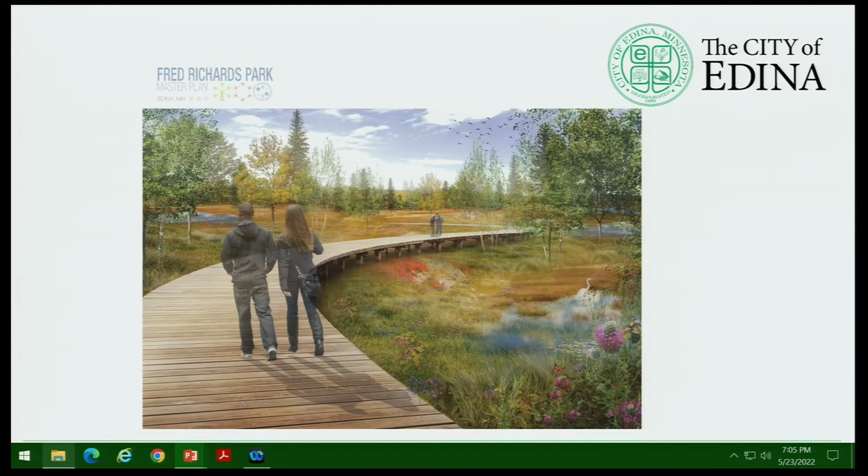Just a couple of ideas or information about the southeast quadrant. It contains about 20% of Edina's parkland. However, it only encompasses about 5% of active play opportunities. Fred Richards Park Master Plan will complement greatly 2 wonderful gems of Edina's park system, and that is Arneson Acres Park, located just east of Highway 100 off of 70th, and what we also consider is the crown jewel of Edina, Centennial Lakes Park, located just east of France Avenue.

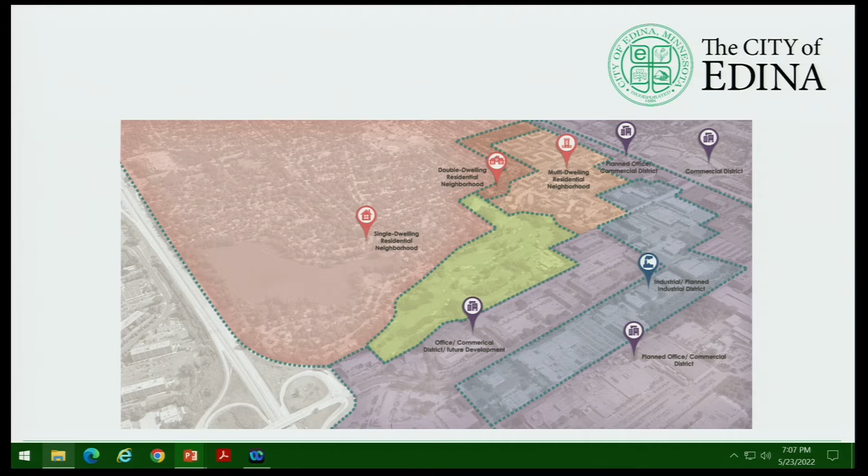As we look at Fred Richards over the years, one thing that is kind of constant is that it has been changed. Change is constant in our park system, in our park realms. However, that change can often go at a fast pace or a slow pace. When we look at this, just the history of that area, we look at very early on. And the Fred Richards area was home to a massive wetland complex in the southeastern portion of Edina.

Part of why the plan you'll see this evening really goes back to its roots and embraces those wetlands that are within the area, and how to assist in some of the major issues Edina faces, such as flooding and climate change, with larger and more intense events that we see on a frequent basis.

As this area progressed over time, we see it transform around the 1950s, 60s and 70s, up to the 80s, where Fred Richards Park went from office and park use into more of an athletics feel, and eventually into Fred Richards Park, the golf course, that closed in 2014.

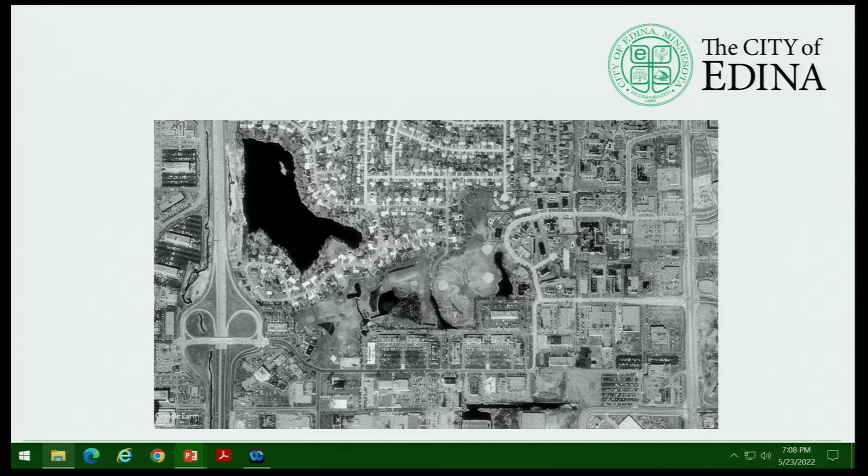As you'll see on your screen this evening, this is an aerial photo from one of those phases, probably around the late 60s or early 70s. It's an undated photo, and you can see a very intense athletic use on the eastern portion of Fred Richards, also with a lot of dark areas that are water. On the left edge, closer to Highway 100, you see remnants of the par 3 golf course.

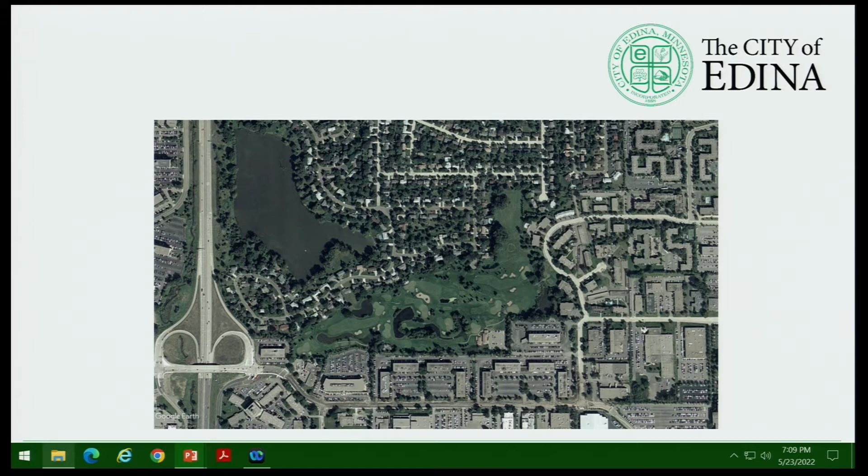What occurred after that was a project timeline to engage residents about the future of this area. It had 4 phases: discover, dream, design, and do. The first phase occurred roughly in November and December of 2016, with a lot of pre-engagement activity, data gathering, wetland delineations, and research.

The next phase, the dream phase, occurred roughly at the beginning of 2017, when a lot of communication and public engagement kicked off, with community gathering meetings, community focus groups, and pop-up activities at the park to gather input.

The final phase was design and do, both occurring in the mid to latter part of 2017, where ideas came into fruition, pen on paper. The do phase highlighted major activities like master plan preparation, review by the Edina Parks and Recreation Commission, and ultimately approval by the Edina City Council. That's the plan adopted in 2017 that we'll review in greater detail.

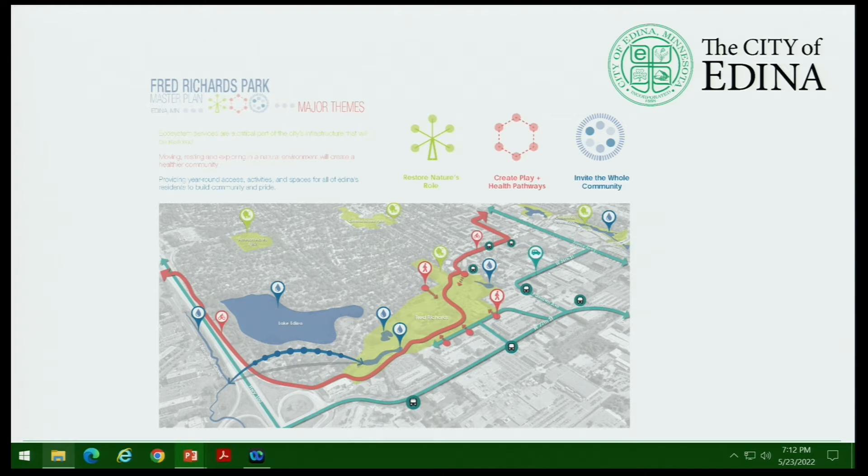Those three themes resulted in the adopted Fred Richards Park Master Plan, which has 5 components, 4 yet to be completed. The first is the nature bank, the second the central green, the third area called the Great Lawn, and the fourth the Loop. The fifth area, completed in 2019, was the neighborhood play area, located on the east side, primarily serving the Parklawn area.

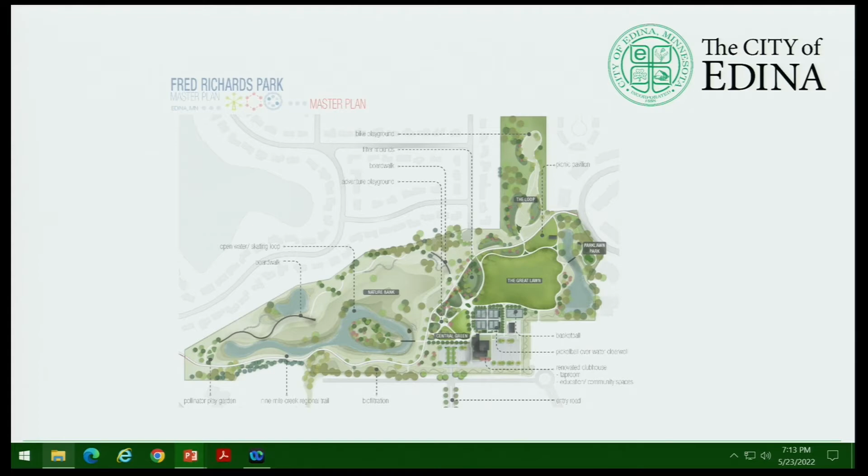So the first theme is restoring nature's role. As I mentioned earlier, this area, and Edina in particular, has a lot of concern about flooding and stormwater management, especially as we look at what climate change is doing in the future—more intense, quick, severe storms—and how Fred Richards can play a role in helping mitigate that.

The idea here was to create a nature bank, wetland banking, restoration of landscape function, and keeping all of that valuable soil on site. This helps solve increased flood pressure, where about 13 acres of wetland complex could be created and about 23 acres of natural area on the western portion of the park, primarily buffering that northern single-family residential area. The idea is to keep that soil on site to help create other functions of the park system.

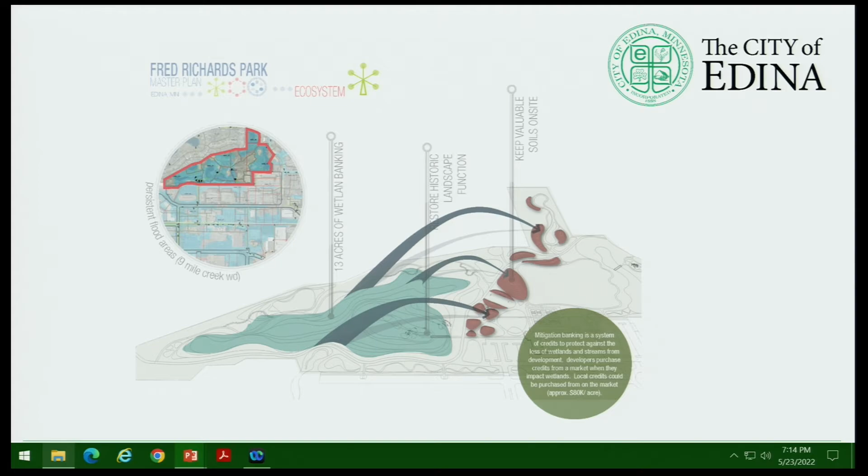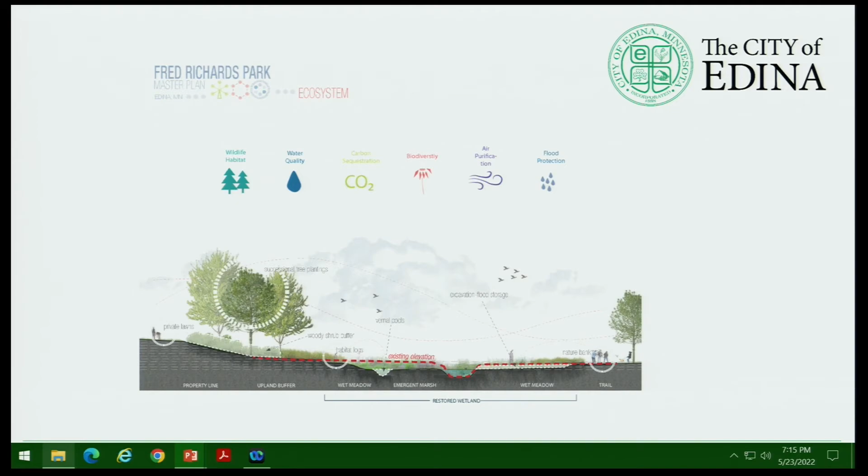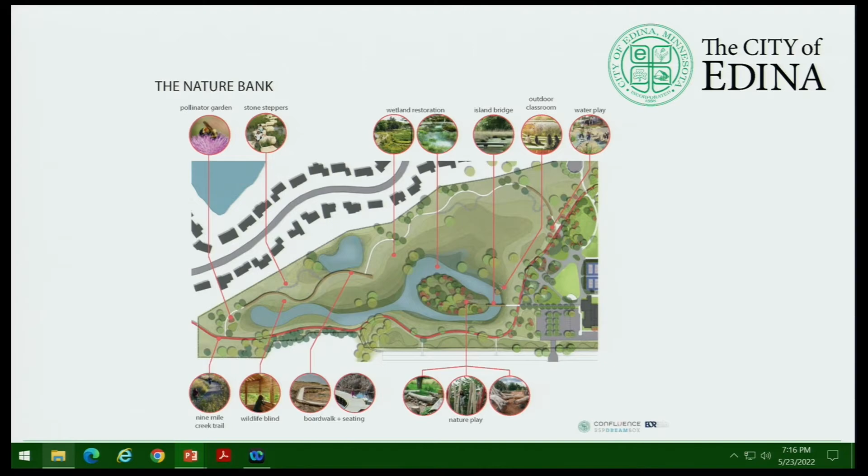This is a top-down view of the master plan. The red line that intersects this portion of the park is the existing 9 Mile Creek Trail system. When we look at that restored or nature bank area, it's primarily to the west and north of the 9 Mile Creek Regional Trail. There would be areas for pollinator gardens, using some pathways as stone steppers, wetland restoration, pollinator areas, water play features, areas to view wildlife and get close through boardwalks, seating and contemplation areas—really an area where we can return to nature and play in those spaces.

Progressing to the second major theme, which is creating pathways for play and health. You'll see this major theme overlaps with a large portion of the park, from the western edge into the more active central area.

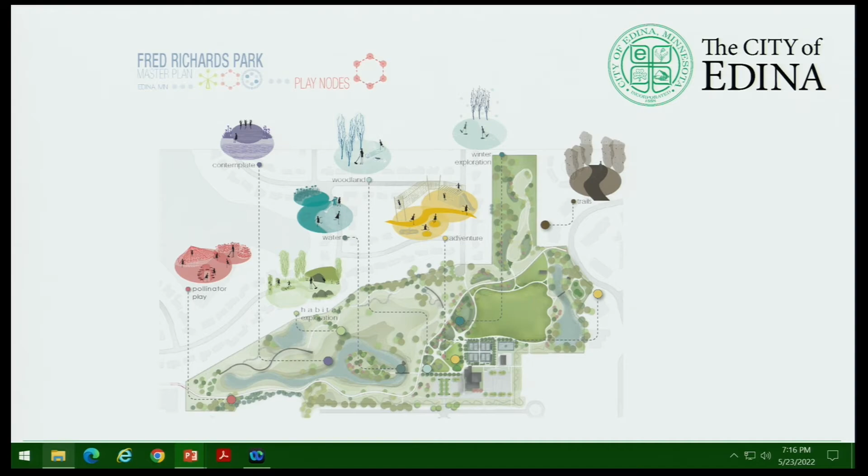The first is creating that pathway for enhancing our pollinators—improving the quality of our restored areas and additional plantings that go towards our climate action plans, more of those specific plantings and enhancements that we can add in that area.

The second piece is contemplation. When you're in this area of the park, it's a little bit more serene, more protective, quiet. You can be by yourself or with close friends and family, really enjoying just that nature and serenity of that area.

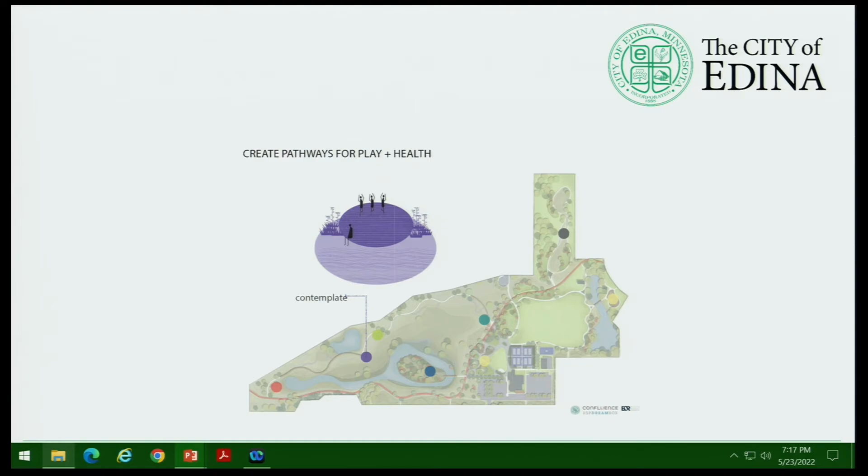The third is improved habitat, as I spoke of. A number of people I've talked to about this master plan are worried about the future of the park—are you going to pave over everything? That's absolutely not. We want to create this habitat, this area of restored function to those wetlands, to attract that wildlife.

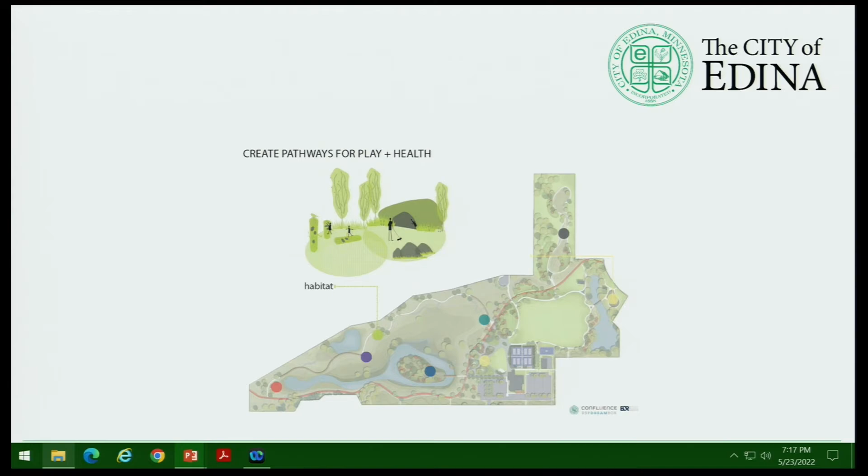Water—creating pathways with water. Understanding, interacting with and playing with water is often a better way to educate and create future visions for how we can adapt to climate change, and really understand the changes we're experiencing here in our community.

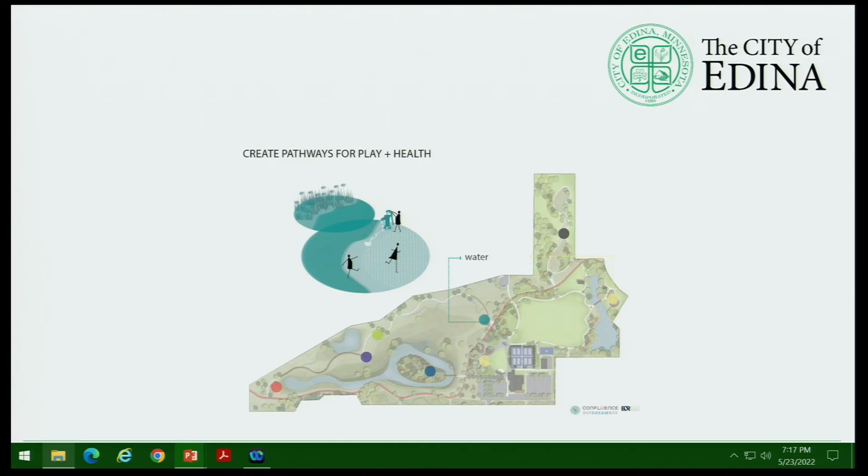The traditional play features—obviously a major function of this park is a community level playground. It would be accessible, reducing any barriers. But we've also looked at how we can have a play area that supports others in our community from a sensory-friendly focus. I've had conversations with representatives from Gillette Children's Hospital about how they could help design areas where children can play in a different manner than they're used to—not only traditional play, but non-traditional, supporting those with sensory needs.

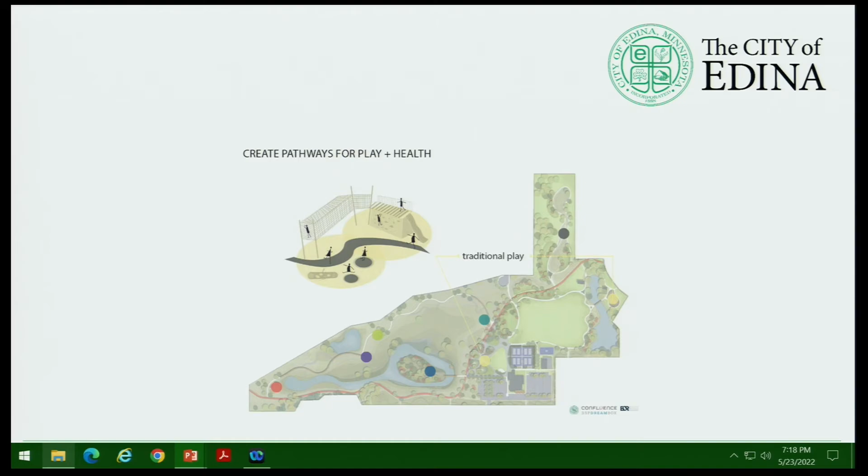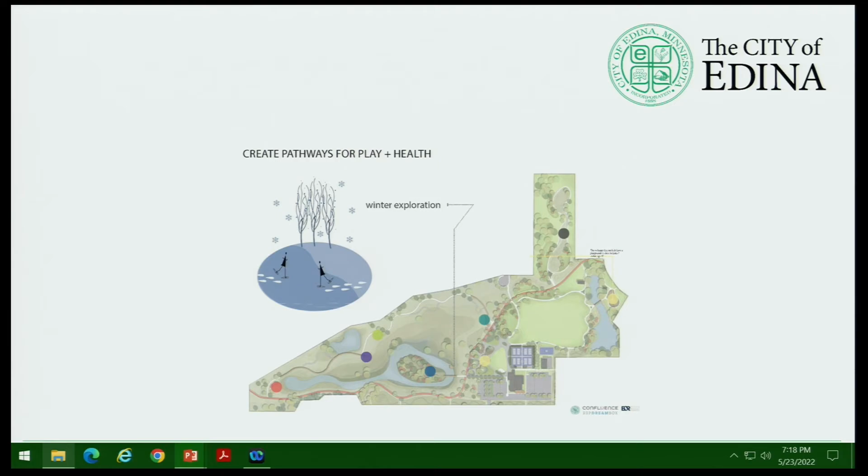There would also be an area for winter exploration. Minnesota is experiencing its major season right now, which is road construction season. Behind that, people's least favorite season is probably winter. However, in Edina it's a little different—there's a strong tradition of skating and use of the outdoors, and Fred Richards would be no different. There would be opportunities for snowshoeing and interacting with winter activities and programmatic elements we could bring to the park.

The other area is the loop—a small area people could walk through, with small trail and bike skills equipment for our younger users, so they don't have to worry about being on a regional trail or near streets, and can enhance their skills on a small loop level.

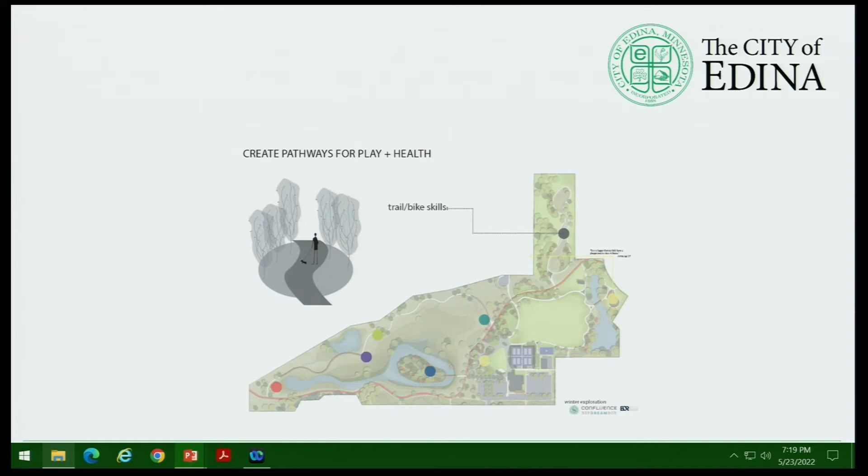And the last theme was inviting that whole community. What does that mean, inviting the community? It means all of the things that Fred Richards Park could support in the future, from the morning walkers that would use its trail system to different activities throughout the day, parent clubs meeting and using the site for a variety of different reasons.

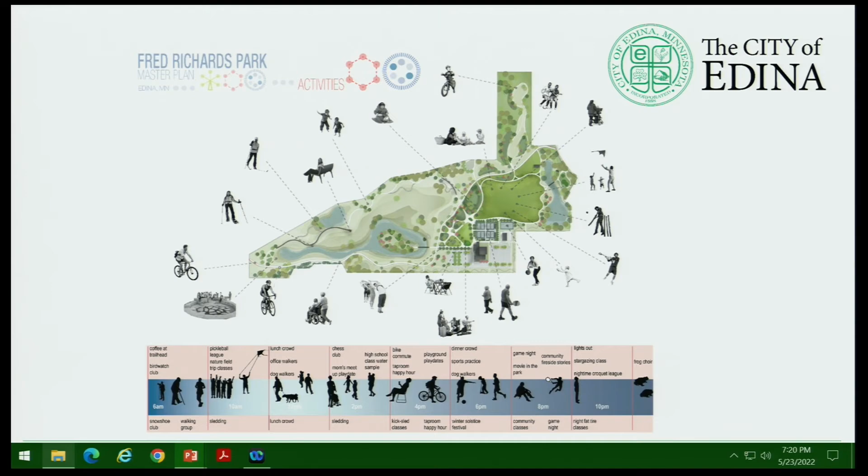After work, people getting together and using some of the more active pieces of equipment, participating in a lot of our programmatic elements that we could bring to the site, and then culminating in that evening use where the bikers are headed home, the walkers are headed home, and the park becomes quiet again, reflecting overnight until the next day's users arrive.

Some of the functions that would support inviting that whole community are enhanced in the central green. That would be the Hammock Grove, a very popular activity occurring now in a lot of our park systems, often called hammocking, with hammocks, people reading, enjoying the day. As I mentioned, there would be unique play elements from traditional to sensory-friendly to accessible.

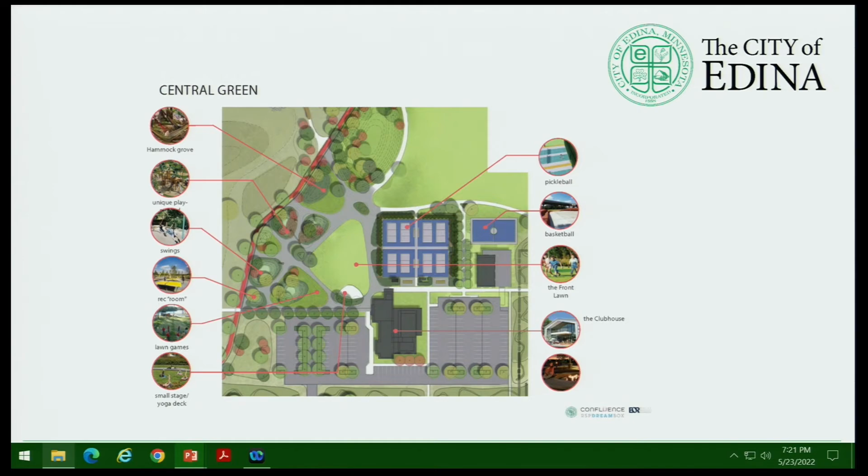There would be obviously swings in a rec room feel with outdoor aspects of table tennis, lawn games, even a small yoga deck that could be programmed for reflection and activity. There would be the clubhouse, which we'll get to next, and the front lawn, and basketball and pickleball.

When we look at the Great Lawn and that neighborhood park to the east, a lot of that soil that we would transform and keep on site from creating those wetlands that traditionally want to be there would be brought in to enhance the park from an elevation standpoint, to help block out that activity from the surrounding areas. There would be a great lawn that could be used for a variety of different activities.

And as I mentioned on the eastern edge, the picnic shelter and neighborhood playground that was added in 2019 complements the site.

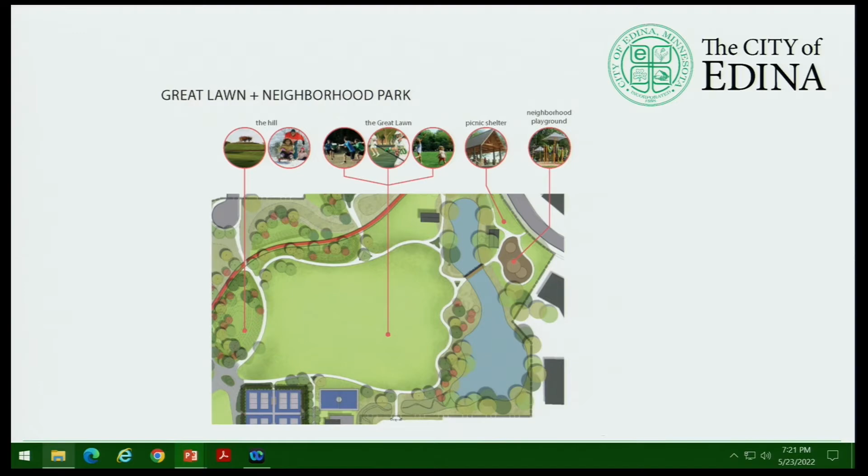When we look at that great lawn, I wanted to be clear, it's not a lit athletic field. In essence, it is just what it is, a great lawn. It can be used for a variety of different purposes. Edina has a rich tradition of serving its athletic partners throughout the community, and this really isn't that. This is more about supporting those non-traditional play elements.

So the field would not be lit. It could be used for a variety of purposes, including camps and clinics serving the neighborhood. As I mentioned, we don't have a lot of active space in this quadrant of the city, so it could support various other uses. There could be music, there could be pop-up activities. It could be used for reflection or programmatic senses that we, as a department, would program. Also, it could be used for winter activities.

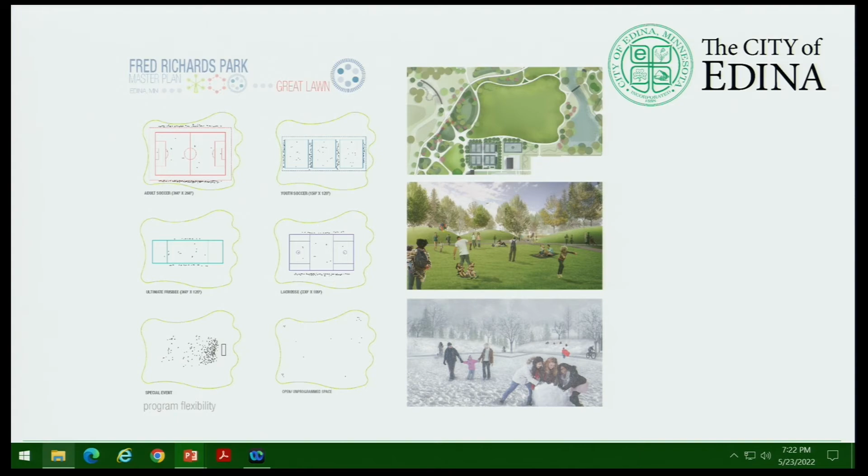Now, we don't have a lot of these areas in neighborhood parks or mini parks because it traditionally requires a trade-off between a traditional active playground or being more nature focused. A lot of times our neighborhood parks and mini parks traditionally just have that traditional play. One of the advantages of the Fred Richards Park Master Plan is it has both of those options for us. We can have this type of nature play where pollinator gardens, building logs, and climbing apparatus can really be one within nature. It provides a tremendous level of different experience.

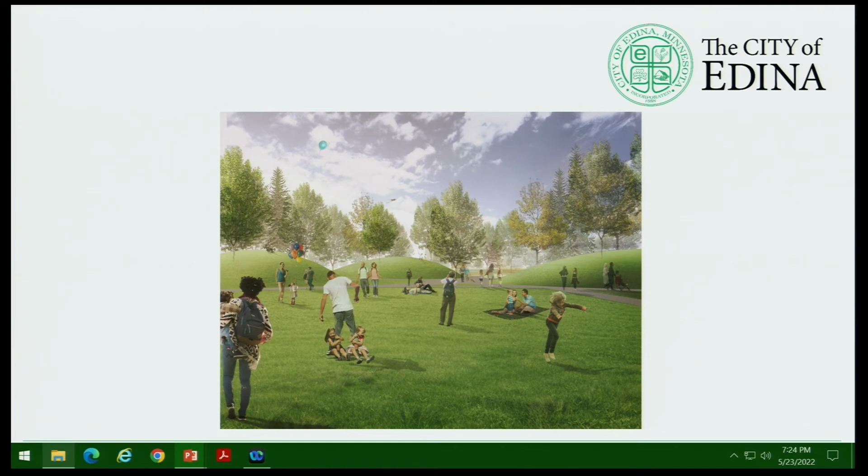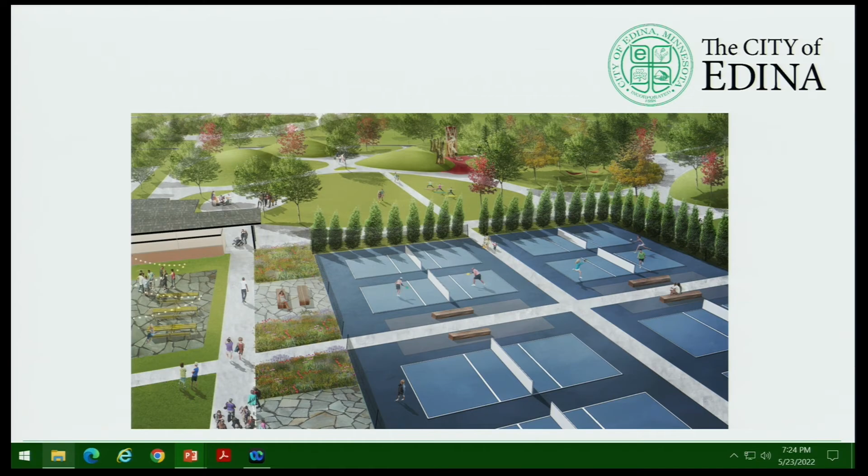Last but not least, I could not recommend enough how often pickleball is brought up in our community about expanding. I think one of the great assets of the Fred Richards Park Master Plan is it helps solve that need of pickleball demand we have in our community. For those that aren't familiar, it's a growing and popular sport that is taking the country by a wave. We currently have 5 courts at Rosland Park, often very busy.

Whether young or old, it's an activity that sees no age limit and is extremely popular, as I mentioned. I think that's one of the great things about this master plan is it really was ahead of its curve adopting this in 2017, recognizing that increased demand of pickleball and its growth.

So in summary of the Fred Richards Park Master Plan, it does contain those 4 elements that still remain: the nature bank on the western and northern edge, the central green right off of the clubhouse area, the Great Lawn as we call it, and to the north, that small little nature loop.

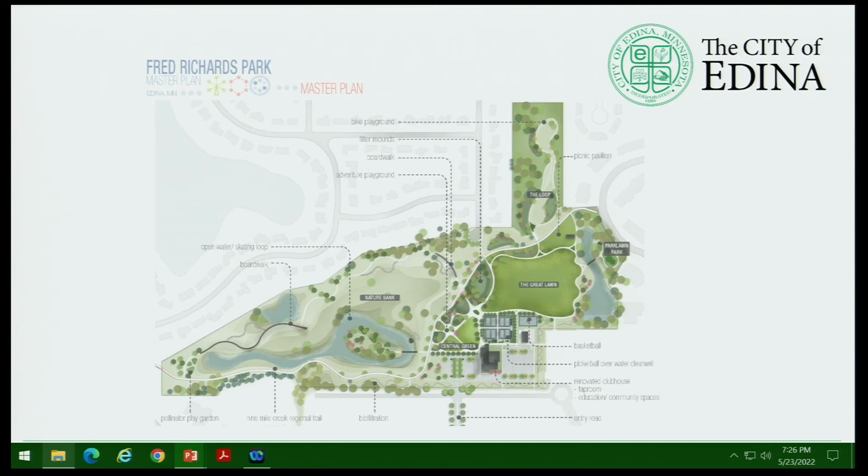The area on the eastern edge, as I mentioned, the Parklawn play area was completed in 2019. So in essence, the Fred Richards Park Master Plan really has these 3 major themes in summary: restore nature's role, create pathways for play and health, and then inviting the whole community.

With that, that'll conclude my presentation on Fred Richards Park Master Plan, and we can turn it over to the question and answer portion of this evening.